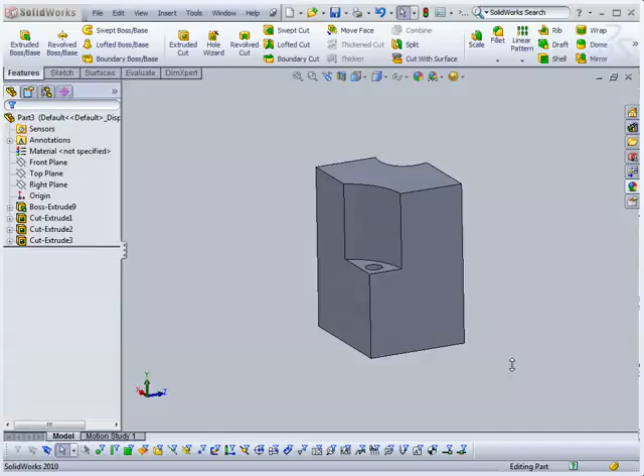Okay, so for homework in our SolidWorks tutorials, we started building a city. I'm going to close this document without saving, and we'll create a new document, a part.

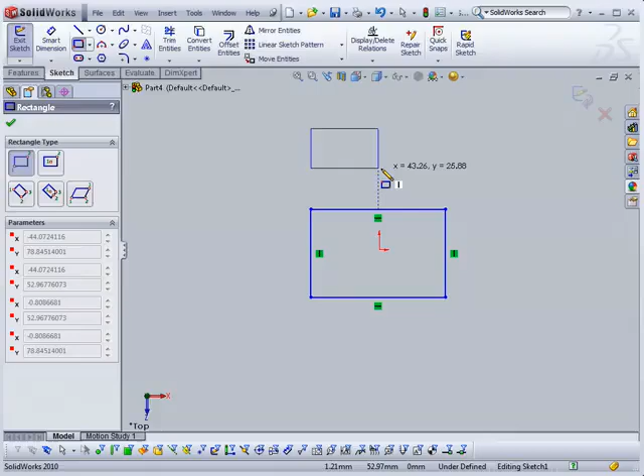On the top plane, we'll create a sketch. We'll click on our rectangle tool, and I'm just going to start drawing my basic grid, my basic city layout. I'm going to draw it all in one sketch because that's perfectly fine in this case. Some cases you won't want to do that, but I'm just going to draw some kind of reasonable composition. Maybe we'll do a round building too, why not?

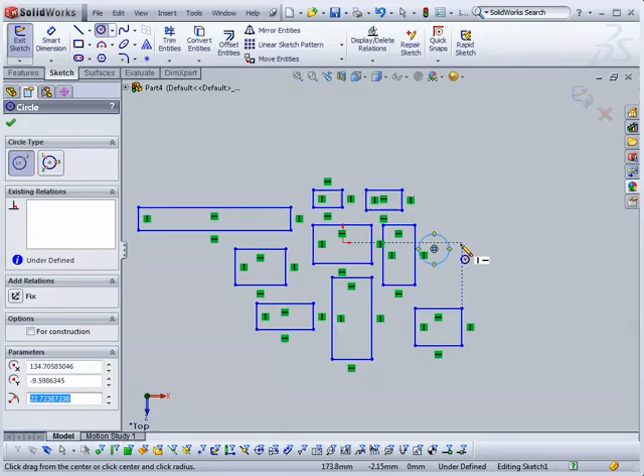And once I feel like I have enough buildings here, different shapes and sizes, to create a composition, then I'll click OK. Now we have our 2D building layout, and we'll go ahead and start extruding some of these.

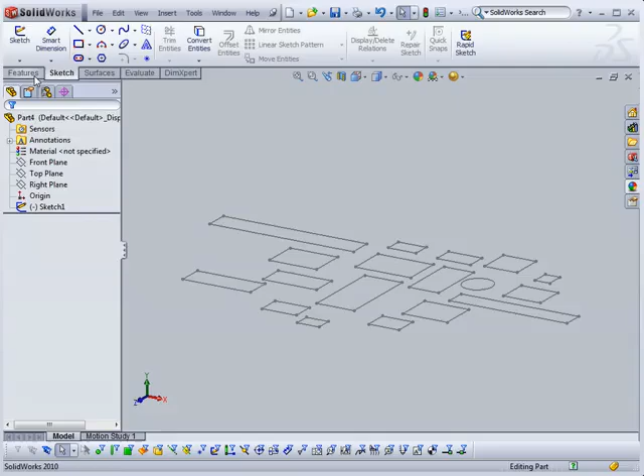So we can create an extruded boss, select this guy, and I may actually, over here, expand selected contours, select it, and then deselect this, or select that. There we go. And right now, I've accidentally activated double-sided extrusion.

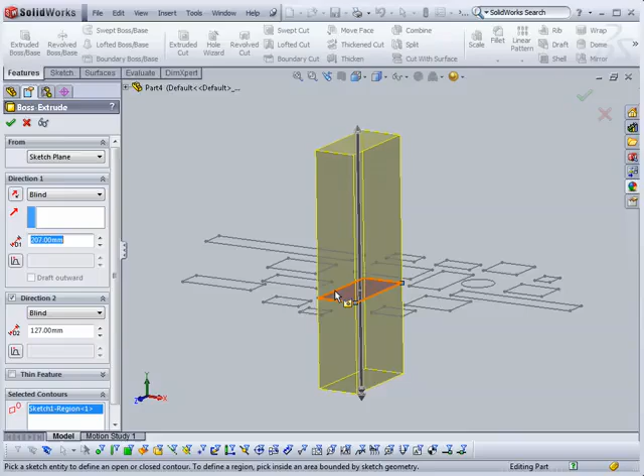I actually only want one side, so right here, where it says direction 2, I'll just uncheck that. So we only have one direction, just going straight up. We'll make this one building, and hit OK.

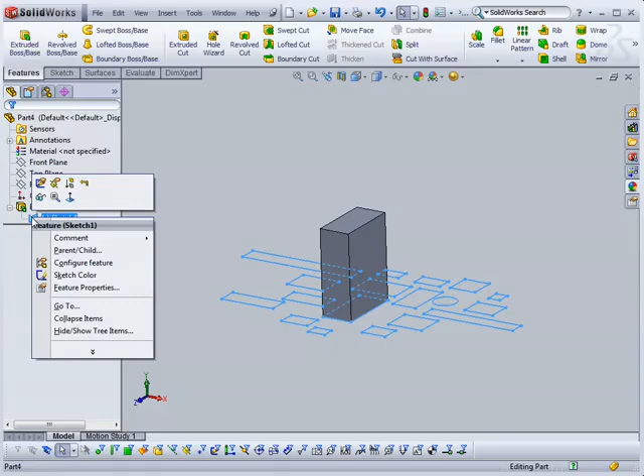Make another one. Now, this time, instead of reselecting it every time from the tree, it's hidden my sketch. So here, I'm going to right-click it and go up to Show my sketch. So now I'm looking at it all the time, so I can just go extruded boss and choose like this one and go selected contours and select this shape, make it a really tall building.

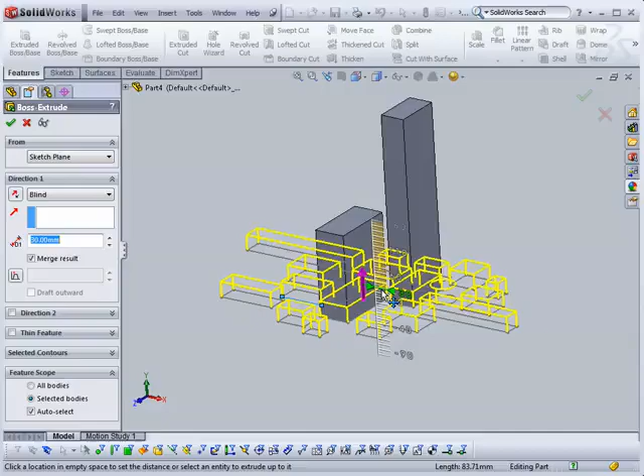And so I can just keep doing that. Now these are all in one sketch just to make it a little easier to deal with, but if you did them separately, that's a whole other advantage. Alright, so I've got a bunch of different ones here, and let's assume that that's what I wanted. I would probably do a little more detail for my city.

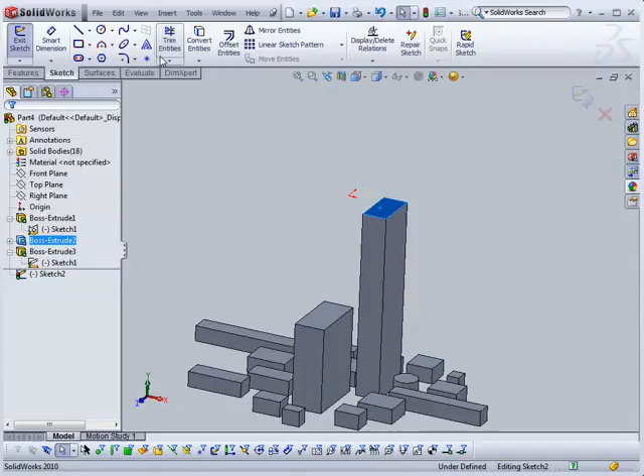But now we want to add some detail to these buildings, so I want to add some cuts into them. So what I did in Rhino was I drew a rectangle down here, dragged it up, and did a Boolean. In SolidWorks, I'm going to select that top plane and say extruded cut, and then draw a rectangle up here.

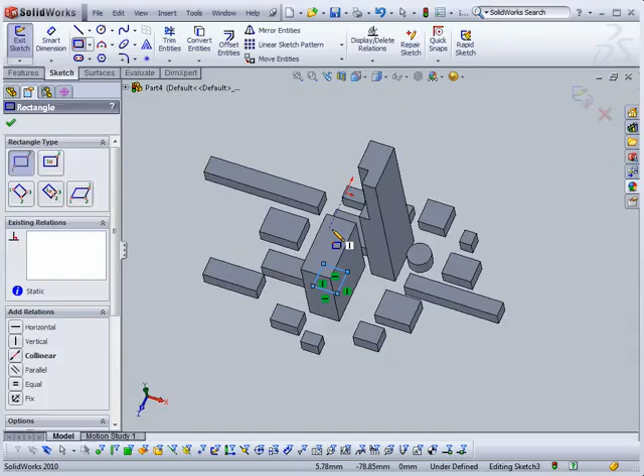Hit OK, and then just tell it how far I want my cut to go down. There we go. And I could do another one on the other side, or I could do one on this building if we wanted. So let's do extruded cut, and this time we'll draw a rectangle here, and maybe another one over there as well. Okay, now we're extruding both of those, just part of the way down.

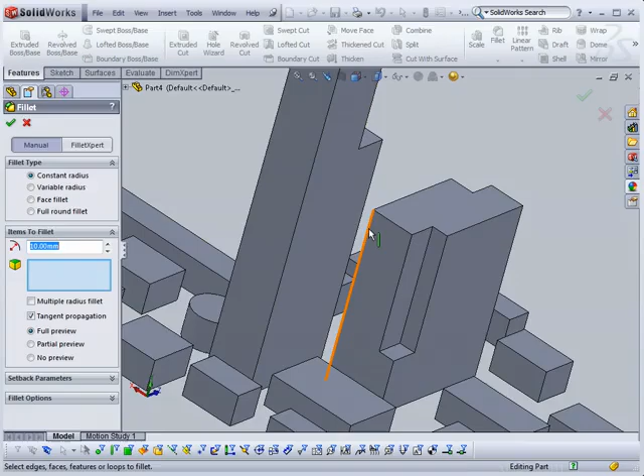Great. And in Rhino, we also looked at the solid fillet tool. So let's go ahead and try that here. Up here at the top, we have fillet. We can also go up to Insert, Features, Fillet, Round. We'll select that, and we'll click an edge. In this case, 10 millimeters looks all right on that edge. Click OK. And now we have a nice round on that building.

If I want to change that, I can double-click it, or I can go over here to my fillet and say Edit Feature. Then I can change this to 20 millimeters to make it bigger. I can add a new fillet, maybe on this top edge, and we'll make that 5.

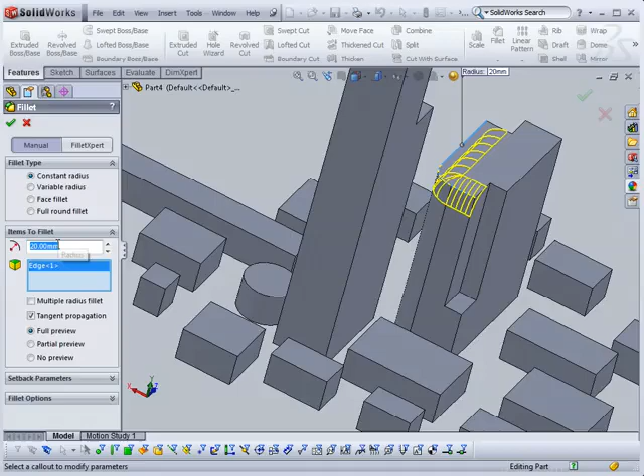So we have a round on top of our building. We can add another big round over here. Make this one 25.

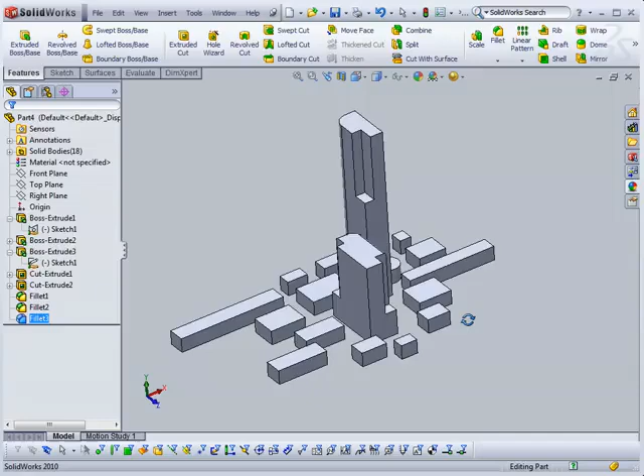In Rhino, we added a big spherical building. To add that here is a little more complicated, but there's a relatively straightforward way we could do it. There's no sphere tool in SolidWorks, so you have to manually create spheres, and this is not the way to do it, by the way. But this is a little shortcut using the tools we've already gone over to do it in a hacky way. Don't ever do this in a professional setting because people will make fun of you.

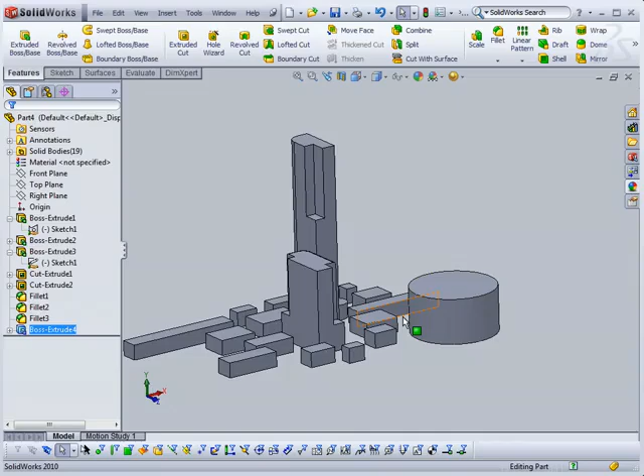So there's your draw a cylinder, and then we'll just put a big round on it, a big fillet. We can select this edge, or we can select the top face, either one, and we can just make this really big. Okay, now we've got kind of a dome over there.

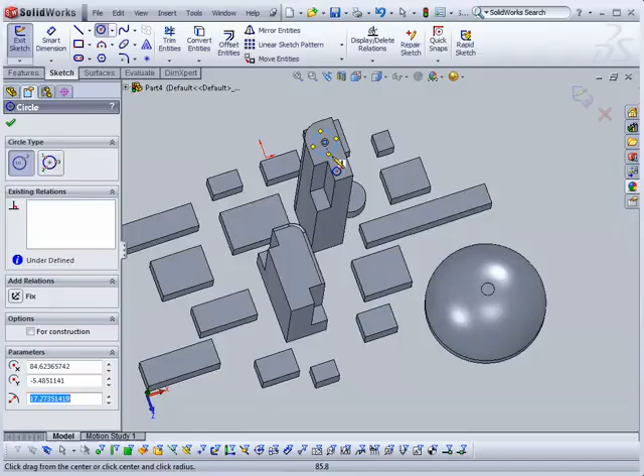Now we could add a similar dome on top of this building, like I did in the Rhino tutorial. So we'll add a circle right there, extrude it up just a little bit, and put a big old round on it. We'll call it 5mm. Just raise it up a little bit. There we go.

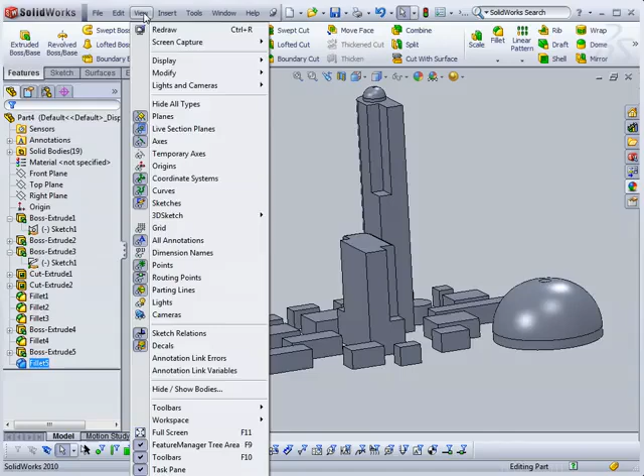Now we want to get a decent view of this, and in Rhino we were able to easily change to perspective mode. So we'll go here to View, Display, Perspective, and that'll give us some perspective, which looks pretty good. But in Rhino we could change the focal length of our lens to make it a wide-angle lens and make this all fisheye and dramatic.

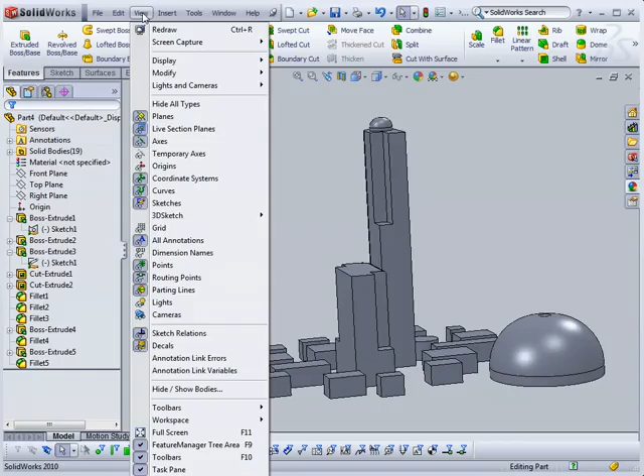The way to do that in SolidWorks is, again, a little more roundabout. So we'll just go View, Lights and Cameras, Add Camera, then we'll just click OK in this case. Then we'll go to View, Display, and then down to Camera View. So now we're looking through the camera we created.

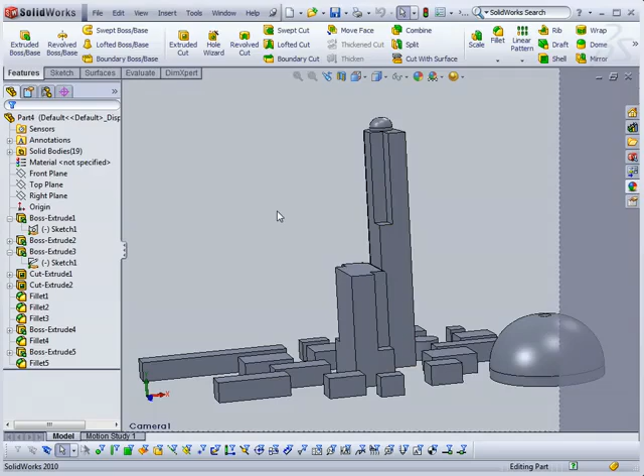Now if I try to rotate this view, it says camera is locked, edit or unlock to allow movement. So what you do is you go up here to View, Lights and Cameras, and then say Properties, Camera 1.

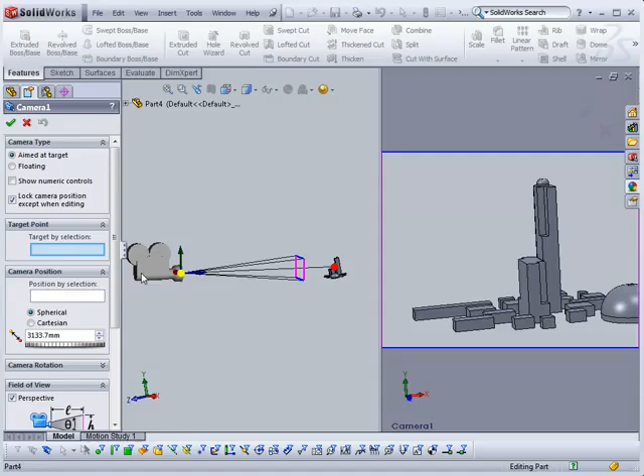And that brings us back here to the same window we saw when we were first setting up the camera. Over here on the left, we see a perspective viewport where we can actually see our camera in space, and we can move it around if we want, change different things about it. It's automatically focused right on the center of our object, so it keeps us looking at it.

Now I want to change that. I just want it to be a free-floating camera. So I'm going to go here and change it from aimed at target to floating. Then I'm going to change, it says lock camera position except when editing. Uncheck that because we want to be able to move it.

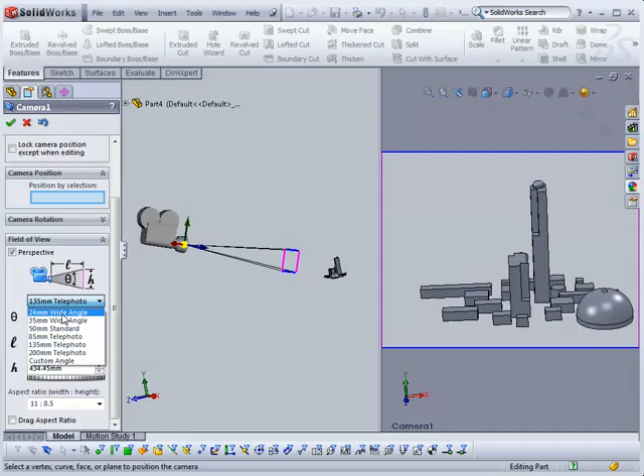And then down here under perspective, right now it's on a 135mm telephoto, a long lens. Let's change this to a 24mm wide-angle lens. Click OK. And now, if we zoom way in, we'll have much more of that dramatic fisheye effect that we were going for in the Rhino video.

So, there's your basic homework equivalent for SolidWorks, and hopefully that'll help get you started.